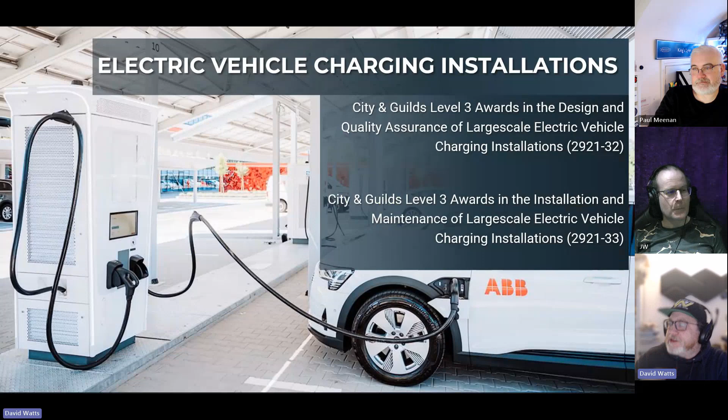So I guess the first thing, I'm going to quickly scan through this material just to get to some key areas that we do focus on.

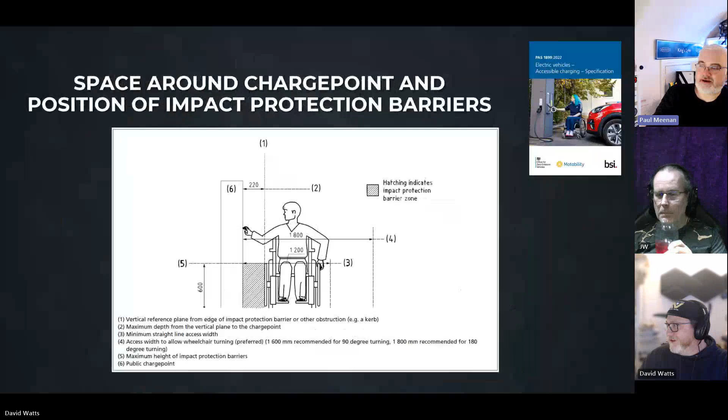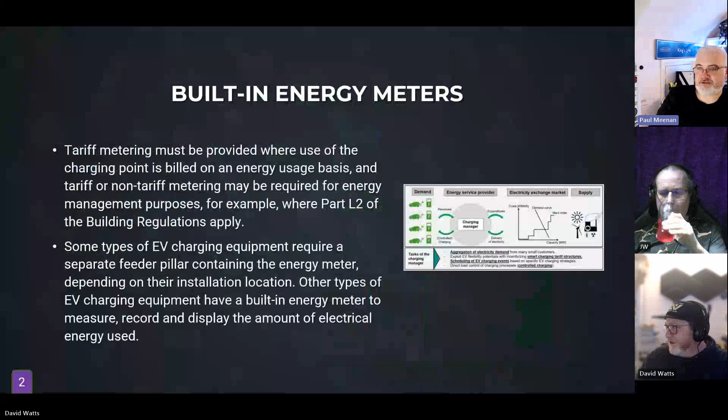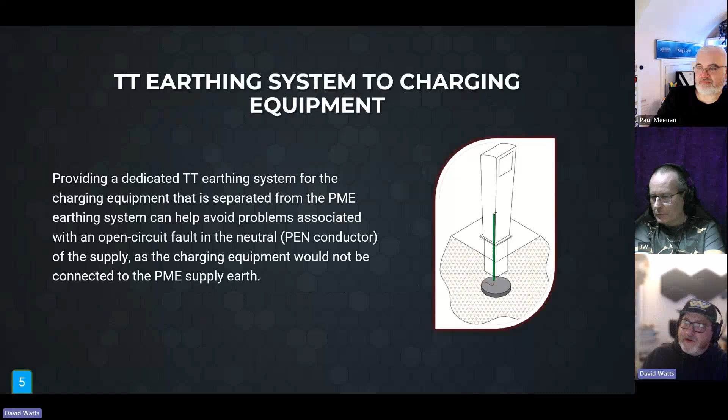For those who are listening, Mr. Watts has got on the screen some of his marvelous EV charging standards and training material, which I'm looking forward to attending one of those courses in the future. You do some quality stuff, Dave. You really do. It's so easy on the eye. That's one thing I love about your stuff. It's an awful lot of work. I'm right now working on my level 3 2365 stuff. I'm trying to get that remastered because the City and Guilds stuff is just not very good. And there's no better compliment than seeing some of your images in there as well. I'm always on the lookout for good training images for you, Dave. And as you can see, they get used.

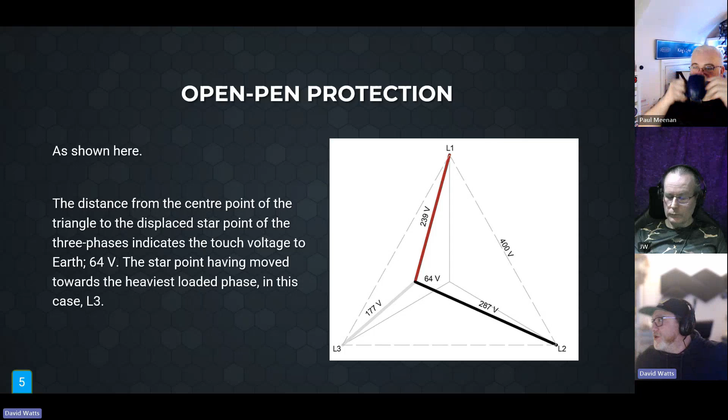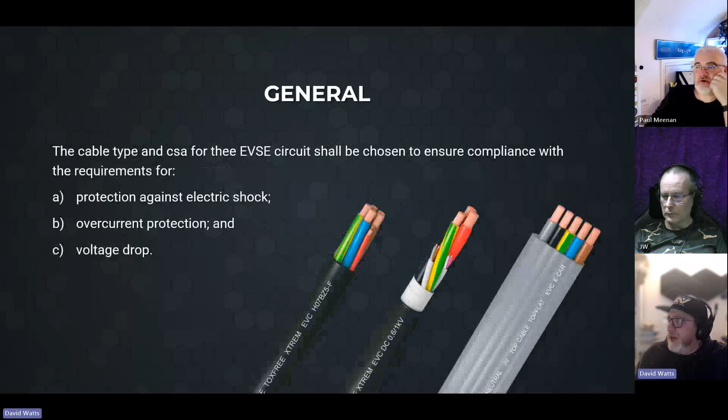So this is the image that me and John have just alluded to with regards to the changes of open PEN. This has been recognised as one of those little issues, but this is more of a domestic challenge. But large scale challenge. We'll brush past 61851 because that's a whole other area. But we cover all sorts of stuff on the large scale courses. But this is where the fun begins. So we have the challenge of

reactance in systems. Okay, so most electricians, when they do designs or cable designs, they do the regs course, they do inspection testing, Ib, In, Iz, calculate It, work out volt drop. Even when they're working on the 2396, the designs really are just for small systems, lighting, power, submain. Nothing is big. And they'll just use software for everything else. And what we highlight in the large scale courses is that we need to identify the concern of reactance with our circuits.

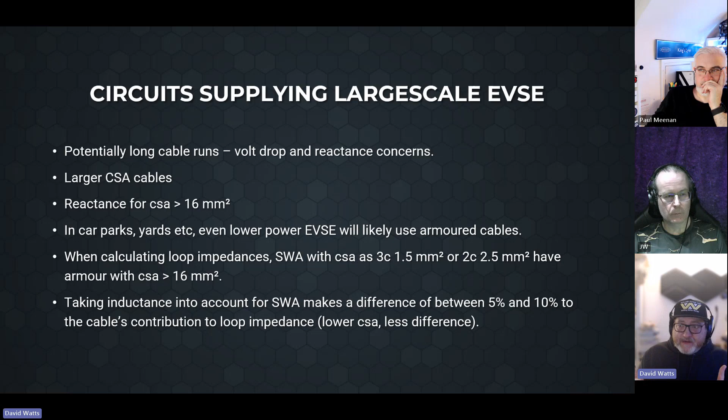So when you look in Appendix 4 in the regulations and you go to cable sizing, the volt drop columns, you'll see that when you get to 25 mil and upwards, you don't just have a single value, you then have three. You've got your resistive value, your reactive value, and your impedance value. At that size, we have to start taking those into account. So with large scale, we have a huge amount of power, and especially if it's AC, we have a likelihood of reactance. So what we cover in the course is reactance. And this is just a little preview of what the formula looks like.

Now, this is actually now in the latest IET code. It was added to the latest IET code because of this course, as Appendix M or N. You'll get these formulas in the IET design guide, in the back, I think it's section D. Yeah, in section D. The one that I'm showing here is just where we're using the armor as a CPC.

So when we have a conductor greater than 16 mil, we have to consider the impact of reactance. And in this formula, it's just the armor that's being used. There's another one that we also use in the course where we have a parallel conductor. But we have this conversion of R1, R2. We have to get Z1 and Z2. Right, so we've gone from ZS equals R1 plus R2 plus ZE.

So we now have Z1 plus Z2. So what have we got defined as Z1 and Z2? Is that the parts of the circuit at different points? So the supply origin and then at the end of line? So Z1 and Z2 is basically like what we think of as R1, R2, but it's including the reactance within the system. Oh, so the CPC and the armored equivalent then. Yeah.

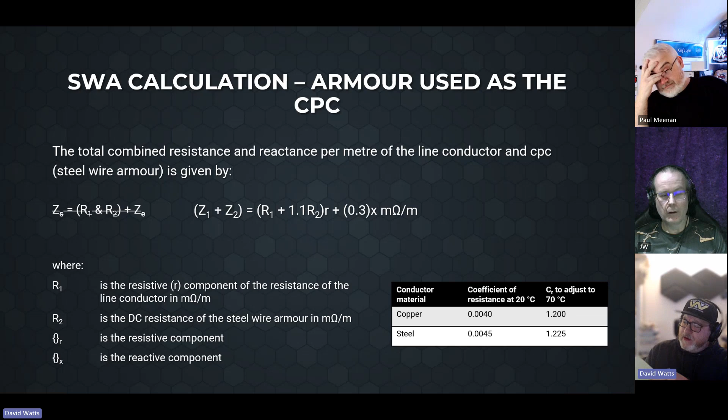But the IET design guide does have this stuff in it, it's just in a section at the back, I think it's Annex D, which is just like other calculations. It'd be nice to get more use. Yeah, further cable calculations, the section's called. But it's good to explore them, and it's good to see how they get used. And I'm trying to bring them into the design course, the 2396. This stuff is technically beyond the 2396 because the 2396 never goes to this level where we have to look at reactance calculations in all the history of all the papers that I've seen.

Now, on my 2396, I have on-demand videos where I go through this as extra, but I can't do it as a fundamental because it'd be too much for them to do their exam. We don't go down that far. The 2396 just focuses on small power circuits and one submain. So there's a model in this course presentation. I go through a few examples, but in the presentation there's this one.

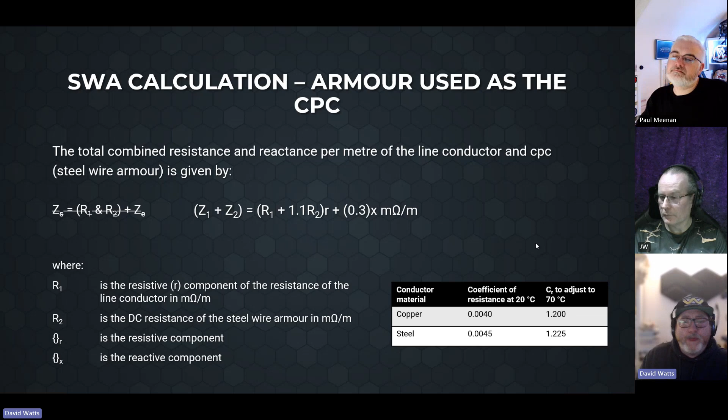We get the data for an example from the table. This is a table that is in the IET design guide, and it's now in the EV code of practice. This includes the DC resistance of armour with regards to the number of cores. The column on the left is the size of your live conductor. Then we have the copper and aluminium cable. So that left hand is the same as the resistivity of conductors for DC resistance. So the DC resistance of armour. DC resistance, yes. Not AC resistance of armour, DC resistance of armour.

We have the DC resistance R. We then work out the reactance when they're large enough. And then we do the square root. Z is equal to the square root of X squared plus R squared. So we turn them into an impedance, which is AC, when we apply the reactance.

Yeah? Well, this is just saying what we've been saying for a very long time. That whole ZE, R1, R2, ZS, the dead test of DC and live test of AC can't mathematically work out and equate unless the magic maths fairies make it equate. But I think John hit it on the head, where really this is only going to become a problem with reactance when the conductors are large and the power is large, or the frequency is large, where there's huge amounts of inductance. So here's a little model example that we go through. If you're watching this on YouTube, you can pause it and have a go before I go.

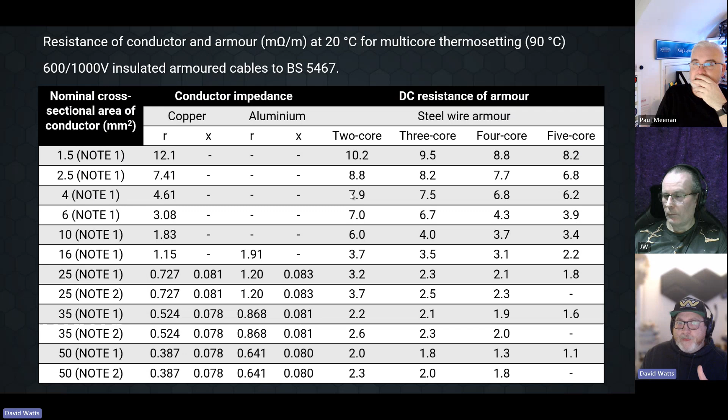But we look at the resistive part. We find the DC resistance of R1, which is a 4 mil conductor. We find the DC resistance of R2, which is a 2-core 4 mil. So if we look at the previous table, we would go, okay, 4 mil, 2-core, 7.9. And if we find that as a DC resistance, we've got 4.61 and 7.9. That's the R1 conductor resistance. That's the R2 armor DC resistance.

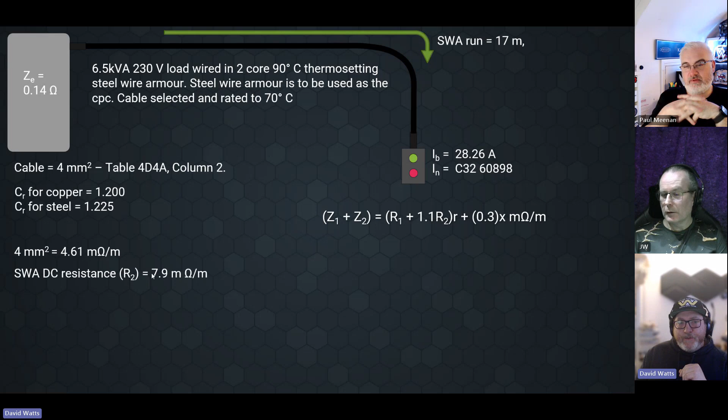We have to apply adjustments for temperature to run them to ZS, because at ZS, they'll be at running temperature. So we just take this formula and we break it into two parts. We have the resistive part here, R1 plus 1.1 R2, and then the reactive part is just this 0.3 here. So we break it into two parts.

First, we'll do R1, which is 4.61 times the copper temperature correction of 1.2. And we'll add that to 1.1 times 7.9 times the correction of 1.225. Like that. So that's R1, that's R2. And those two combined is the resistive value, just the resistive value.

We work out the reactance, which in this case being just 4 mil, you'll notice all the cables, there's no reactance till you're over 16. So in this case, because it's an armor, we still consider the 0.3. And there is a reason for this. Even with cables as small as 2.5, the equivalent size of an armor is actually justifiable for reactance. This is something that we've clarified with the IET.

We're supposed to be working out reactance even when we use cables that are under 16 mil, if the armor equivalent is greater, which is why they've been using this as a model in the assessments. There's no multiplier for it though, because there's no actual cable that's reacting here because it's lower than 16 mil. So it's just 0.3.

We work out their overall value times their length of 17 meters over 1,000. Gives us that 0.28, gives us that 0.0051. You can already see the magnificent addition that's going to make. Absolutely sod all, which is why we've been doing it the old way. For cables this small, the reactance makes negligible difference.

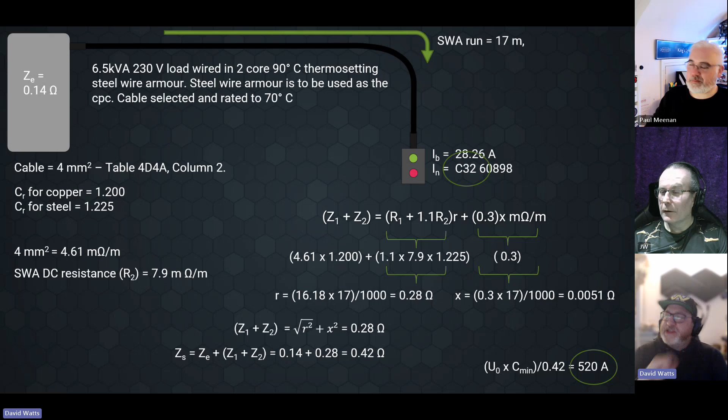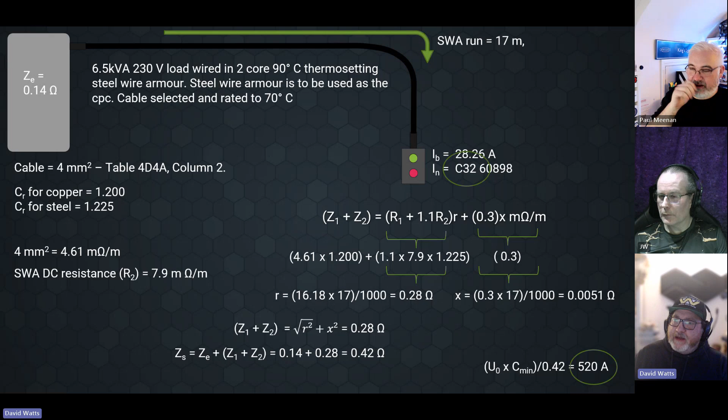Oh, yeah. All right. So that was one interesting area, but the other area is the way these things are having to be installed with regards to planning and installations. So here's an example: grouping, spacing. So this is an example from an installation, large scale EV. We have 12 ducts, and these are 200 mil centers apart. So if you calculate, it's about a 75 mil distance between them. The wiring regulations, from a grouping perspective here, want about a 0.64 or so factor for the grouping of the ducts. And when you're talking about cables of this magnitude in size, it's not workable.

So what they do is they kind of have to play with the data and go to another method. You see? So if we just strictly follow 7671 with a soil thermal resistivity of 2.5 as a default, it won't work anywhere. We have to go and explore the soil. We may have to change the soil conditions in a controlled way to actually lower those thermal amounts.

Just on that. So I'm currently installing new ducting into a railway platform, and we're using a new system called a multi-duct. Rather than having 6 150 mil ducts all spaced out, because of the amount of material and spoil you have to take out, as part of that sustainability drive, they've now got a duct which is like a post box with 6 compartments. It's literally called a 6-way multi-duct, and the railway loves it now because it saves on material out, backfill in.

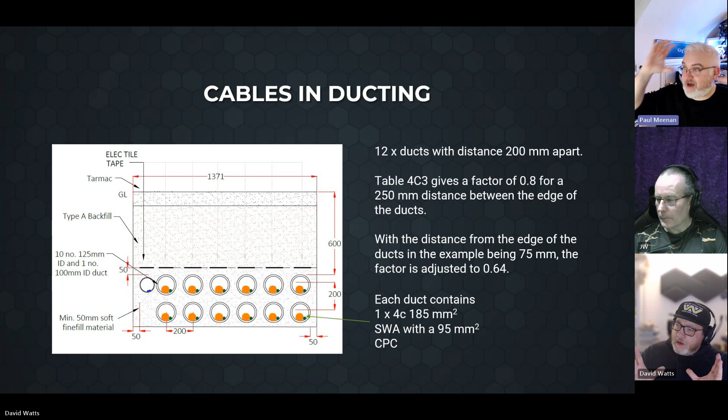But yeah, what about the grouping factors? I'm going to say that does change it. Yeah, is it one duct? It's one duct. Right. I'll get you a photo over the weekend. In fact, I'll get you a photo tomorrow.

But it's one duct, and it's designed to reduce the carbon footprint of duct installations. Do they put just one duct in, or do they put 2 or 3 ducts in? No, just one, but it's got 6 ducts inside the one duct. Okay. So is it just one cable per duct in the duct? It's whatever you want. You can have fire alarms in one, you can have comms in another, you can have power in another, you can have earth, whatever you want. It's another interesting thing on railways.

That's another interesting thing we come to - do you group ducts or group cables in ducts? Both, technically, in this case - that's what the reg says. We actually have to multiply the two grouping factors together. We find the grouping factor of the group of cables in the duct, and we find the grouping of the ducts, and we multiply them for a worst case scenario.

So all of this just makes it significantly more challenging to have a compliant design. I've not seen that in the design software. It's in the regs, mate. No, I know it's in the regs, but is it in the software? I would imagine the software would take that into account - you'd put your grouping in, Cg, and when you say the ducts are X amount apart, it should coordinate two factors and create a new factor. Does it create two Cgs or one Cg that changes as you add two grouping scenarios? I need to check - yeah, interesting.

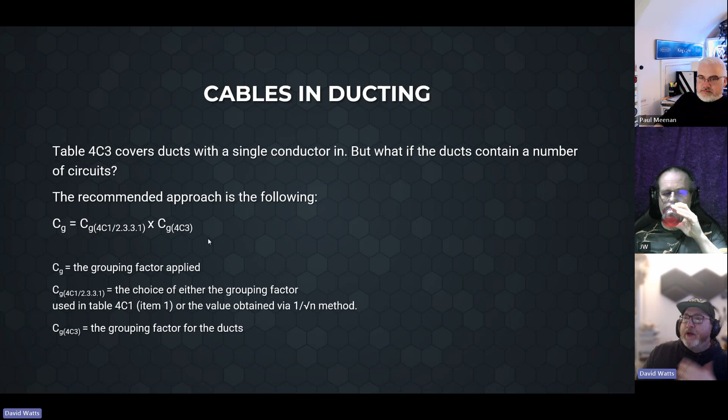This is pushing into an area I found quite interesting when I started this - getting these cables under the ground, looking at soil thermal resistivity. We're not talking about resistivity as conductor resistance or cable resistance, we're talking about thermal resistivity - the barrier for heat dispersing from a conductor. It's not about earthing, where we look at trying to get a nice low earth electrode resistance. We're looking at thermal resistivity here - can the conductor give off heat in the immediate area around it.

So this is where I started to look at the data being used by other manufacturers of cables and where they started to say what their cable sizes were. We found they were using other calculations, not 7671, but they both work to the same 60287 standard or starting point. 60287 is the main standard that no one's ever heard of as an electrician. 7671 takes that and does a very conservative effort, whilst these ERA calculations used in this sector and others have a much more specific use, and we get very different cable ratings.

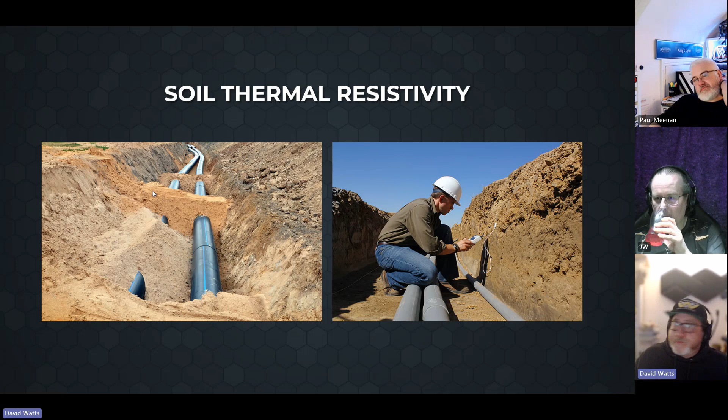60287-3-1, which is a local standard under 60287, has an area in there for the UK. And in the UK, it recognizes the thermal resistivity of the soil to be typically, as a broad-stroke value, about 1.2, which is a lot cooler. There are different materials mentioned as well in 60287, such as chalky ground or different levels of black backfill, but basically it hovers around 1.2. It doesn't have any distinction for seasonal variations, and it has a cooler outdoor ambient and a cooler ground ambient.

Now in 60287, there's a descriptor of the weather conditions that gives us these values, and this is a little summary of what this table says. This data is also in here in Paul Cook's commentary, if you've got the book. Paul Cook's commentary - yeah, cool, that's an old book. Yeah, it's in there. So this is from 60287.

It says that if your thermal resistivity is between 2 and 3, you're between dry to very dry soil conditions, with seldom or little to no rainfall. 7671 puts us in the middle of those two - that's what it claims the UK is. Whilst actually 1.2, which is 60287, says we have regular rainfall and we're moist as our main direction. Now, there are very dry summers and there will be dry soil conditions, but it's most likely that 1.2 is a more approachable value. It's 2.5 because it's worst case scenario when we have droughts - conservative, yeah, it's the conservative approach.

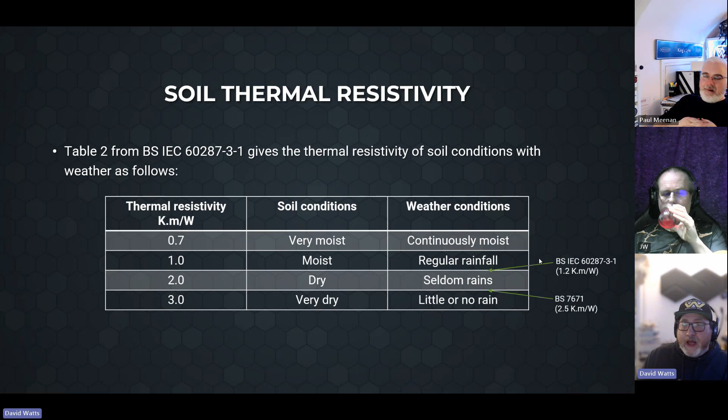Okay, so this is obviously the impact of soil resistivity. You can see here you've got conductors under load, and when there's a 1.2 Kelvin, the actual immediate warm areas just around the conductors are smaller because they've been able to give heat out into the soil. Whilst if the resistivity goes up and up, they keep the temperature.

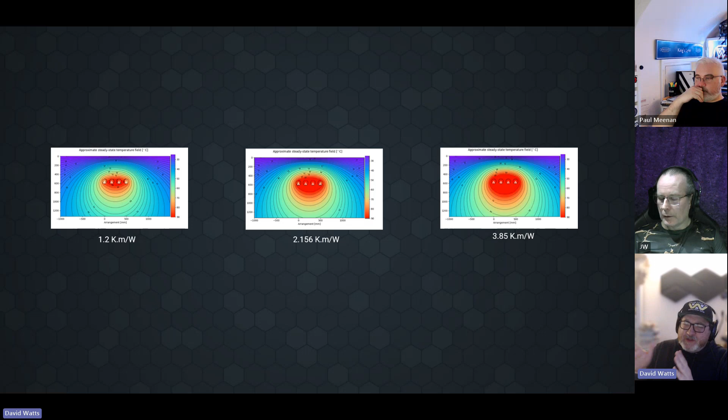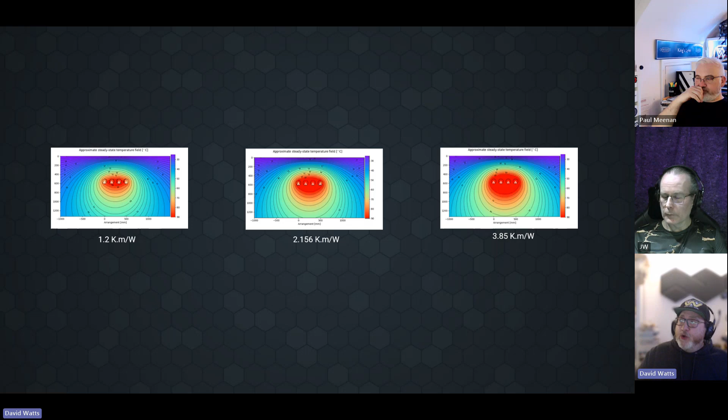So it has a significant impact on cable rating because the soil resistivity impacts heat dissipation. There's a little bit in 7671 about cables buried in the ground. It says under the reference method, in buildings or around buildings, that's suggested to mean that's what it applies to, because if you're out of buildings, you'd probably lean more towards the ERA calculations. It does say in Appendix 4 that if you have specific data on thermal resistance, the ambience, the depth of the ground, you can use the ERA calculations instead of 7671.

This is a little comparison of the two. Very different data streams. There's a part 3 and a part 5 - part 3 is thermoplastic, part 5 is thermosetting. There are 9 different reports in the ERA calculations for different calculations. Quite an interesting read, actually.

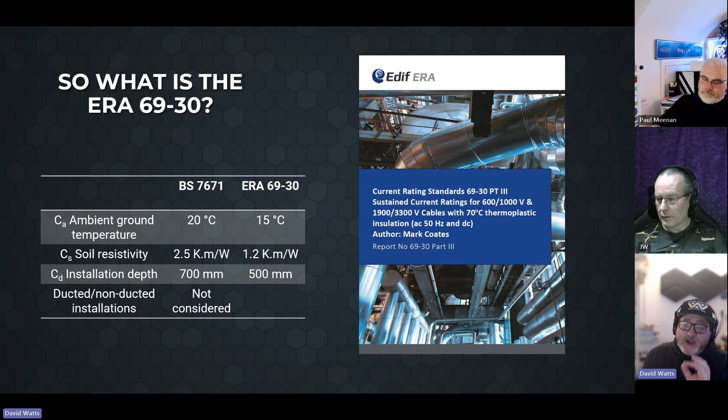So I got 3 and 5 sorted out when I started this, and I looked at all these different data inputs. But it was actually because of the challenges that the designers were having with 7671 that made us look into this. And we found this press release by Prysmian, which also mentions this - it's from Prysmian Group about why they state their cable ratings are different to 7671.

In this release they say that they actually don't follow 7671, they follow the ERA, which is both aligning to 60287. That's the key thing - both 7671 and the ERA calculations align to 60287, but 7671 is under a conservative condition, whilst the ERA requires an awful lot more specific control of the conditions through the seasons. But if you can get those controls and guarantee that condition of the soil, you can get a much better rating in your conductors. This release explains that, and obviously manufacturers want to do that because they can then say their cables carry more current. Wow, you know?

So installation depths are different. The ERA also specifies between duct and buried direct - significant improvement if you bury it directly. Obviously, most people put ducts in for the sake of civils and cable pulling.

But that's the main thing here - these are the two different approaches, but they both match 60287. One is conservative, which is the regs, and one is much more precise data input. Now, the regs is always the fall back and you'll comply, and it's recommended for most designers to comply with the regs, so you have that conservative angle.

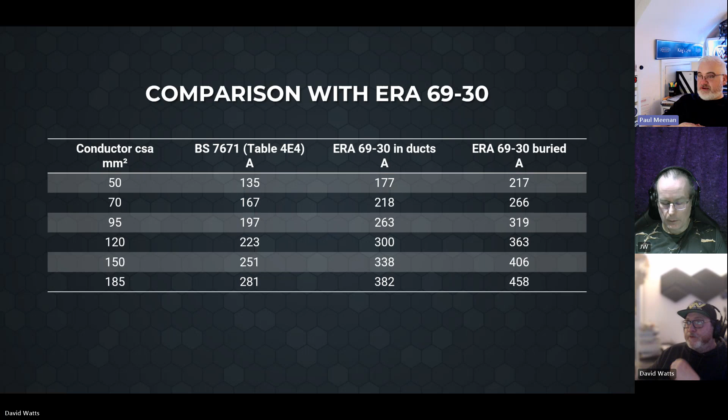Yeah, and we've had a few DNOs on the courses. We've got this other cable they have, I should have brought it in. I can't remember what it's called, a hexafoil or something, where it's arranged in a certain arrangement so it gets an awful lot more current through it, because it's a specialized cable they use from load centers to EVSEs as well. Trefoil, is it? No, there's another word for it. I'll see if I can dig it up. Is it Waveconal or something? Waveconal, I think it's Waveconal. Good old John, he's filled with information. How did I not know that he would know that?

There must be a lot of crossover between this and LV distribution, surely, because DNOs, or DSOs as they call themselves now, have been putting cables in the ground which are massively loaded for long periods of time, for the last 100 years plus. So surely there's a whole wealth of information there which could apply to this sort of thing as well.

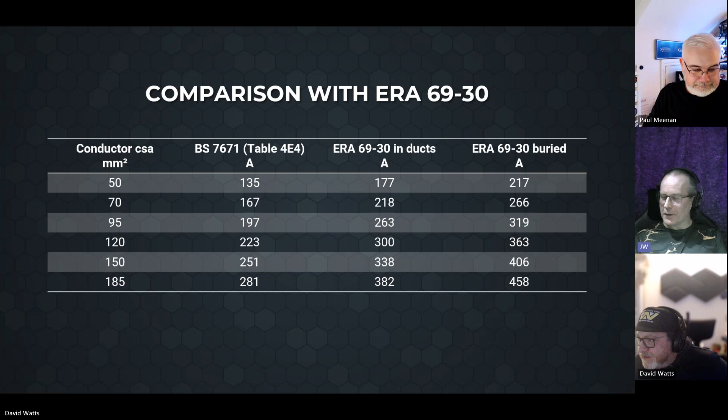Yeah, I'm just looking in my folder. Keep talking, you guys, this is great. I'll see if I can find something on it. And the same with all the stuff about reactance, the cables and things, because again that's all LV distribution and HV for that matter as well. So it's not new information as such, it's just new to these particular types of applications, but the general concepts are there.

I don't know if I'm just thick, or I didn't pay attention in college, or they just didn't teach it. But the older I get, the more stuff I see out there, the more I think, we were never taught this when I was in college.

No. But yeah, having worked for a former DNO, whatever they call themselves this month, the normalization of these common sense things, burying cable direct etc., contact with London clays and the cold moisture, it's going to carry more before it burns out, melts and bakes the ground. We've even seen pictures where you've got snowy ground and the cables are so hot they're melting the snow above it. It's fascinating stuff.

God, we didn't do any of this on my 2919. No, doesn't touch it at all. The 2919, and to be honest the 3.4 now too, it's all about earthing and protection really. On the large scale we have to cover that, but we also have to cover selection, and accessibility, which is a huge issue that people are still getting wrong. A lot of the big players aren't getting it right, even with the latest PAS 1899. They're still not fully doing it. A lot of charger operators and manufacturers aren't even making them accessible still, so we have to put all of that in there as well.

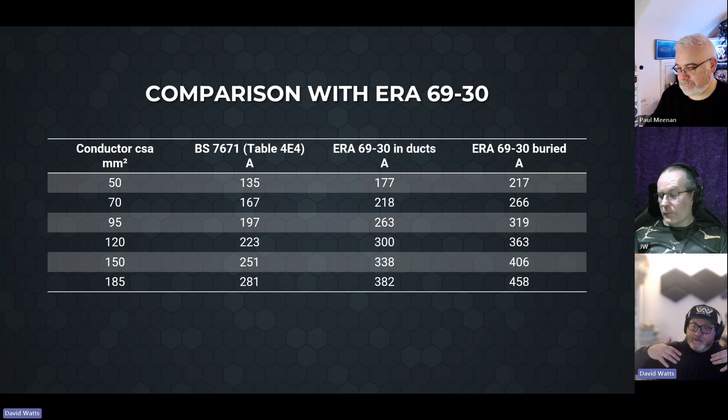And that's the thing, an awful lot of these early cars don't have that demand, they don't have the technology for it. But we're getting the latest Porsches, the latest Teslas now, and they're very much hungry, because they're trying to push and push and push and push.

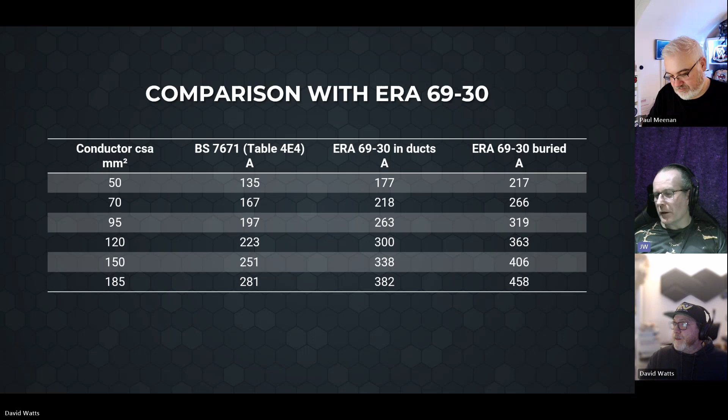So a lot of this stuff that's been installed and open for a couple of years now is going to be soon under a much larger demand than it's ever seen before. Yeah, because there are even certain cars that can charge up at like 300, or they claim to. Yeah, if you arrive there at 10% and the battery's all heated up in advance, and you plug it in, yeah, it will go at like 300, but not for very long.

So you plug it in, it's like, oh, it's 300. Then, oh, it's only 240 now. Oh, no, it's only 180. So certain vehicles will carry on at a large rate, but an awful lot of them, it's only for a very short time, and then it immediately drops back. So, like I say, it's rare that this equipment is even put up anywhere near its maximum at the moment. And this is a concern.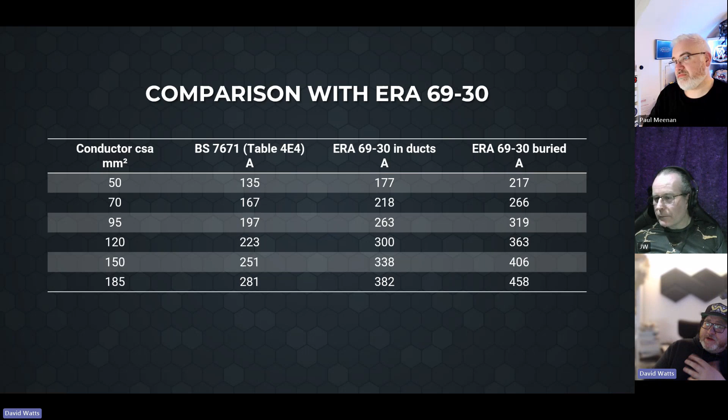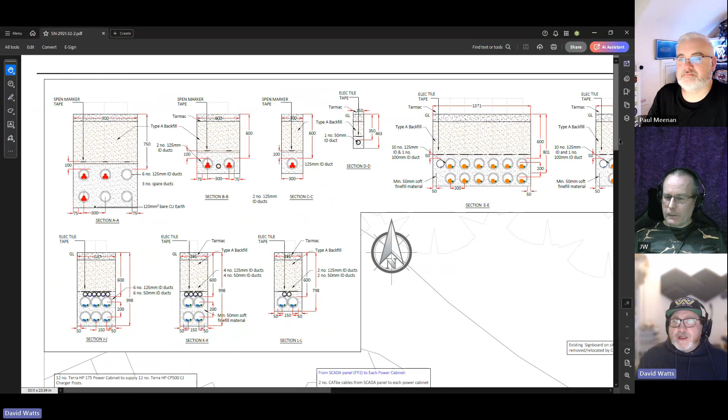I had a chat with the IET about this, because they asked for comments on how this course is going. I said it's good, and I gave them some heads up as to a lot of their designs. 7671 was kind of left at the door at some point because they had to go down the ERA direction, and I've got a drawing here of an installation. Can you see this in the share? Yeah. So this is an installation that was drafted for being put in on a motorway.

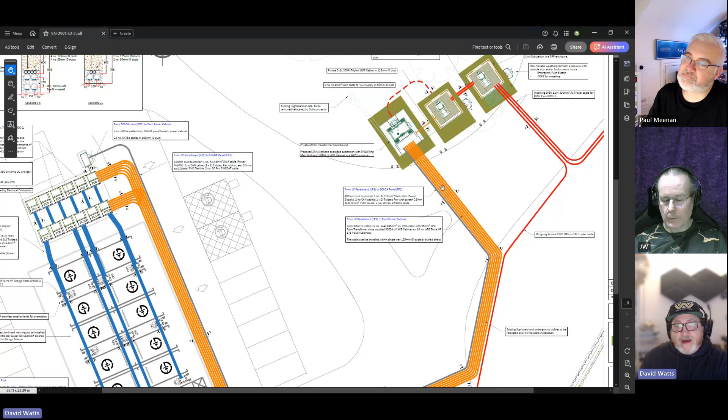And you've got here the ring main of the HV coming in and then leaving. You've got the HV that goes onto the other side for the southbound or the northbound. You've got the AC. These are the AC ducts. So if I go to E here, we've got 1, 2, 3, 4, 5, 6, 7, 8, 9, 10, 11, 12 of them. Wow. You see?

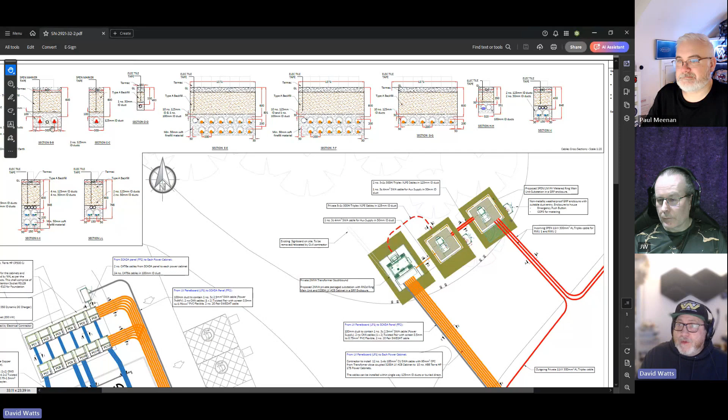So right now they're probably barely ever on to any potential. But if they get put onto a potential, there may be some issue. Hopefully, an awful lot of these will get away with it. But right now, though, we don't know. It depends on how much they demand, how much more they decide to stress out, because they're constantly adding power.

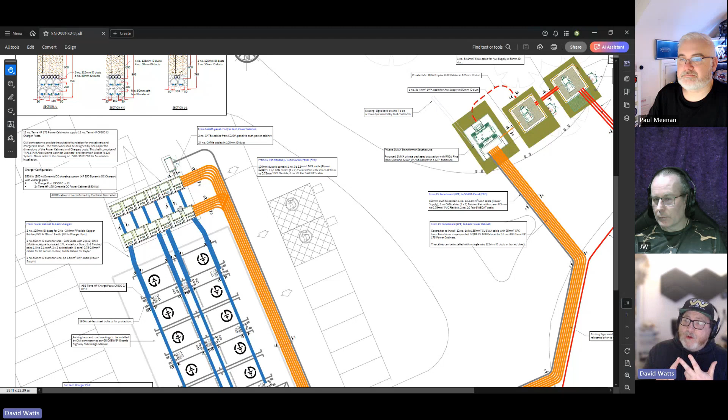One charge point operator, for example, who I won't name, put in an installation just like this. They put in the power cabinets, the charge points, and then the charge point operator who they handed it over to changed the power modules in the power cabinets from 30 kilowatt to 45 kilowatt by themselves to make the chargers more powerful. The way they achieved that is they drove up the DC voltage over the rating of the cable in the DC ducts. And they burnt the cables out.

I believe they promised not to do that again. But that's just the thing. There's this hunger to be powerful, to be quick, to then get people to buy EVs. We're talking here about rapid charging now, not destination charging. So the main point of the large scale really is to focus more on the rapid charging. Large power, quick, get in, get out.

They want you to basically be charged up by the time you've gone in there, bought yourself a coffee, and used the toilet. They don't want you more than 40 minutes. Because this is expensive infrastructure, and they want every other car to use this technology in the future. So they need you to get in, get off, get on. Isn't it limited as well? If all the bays are charging, it will limit each one's charging capability.

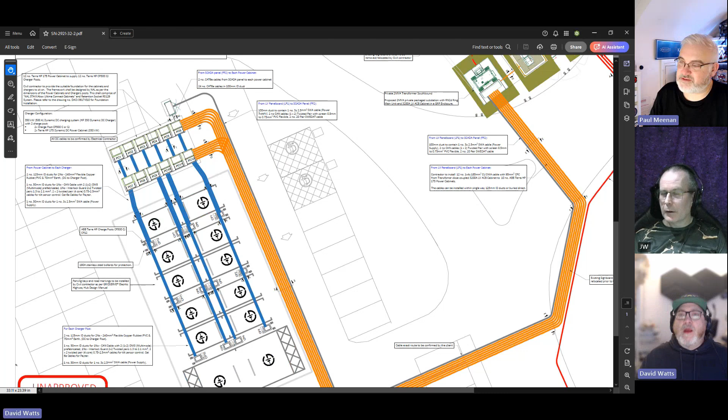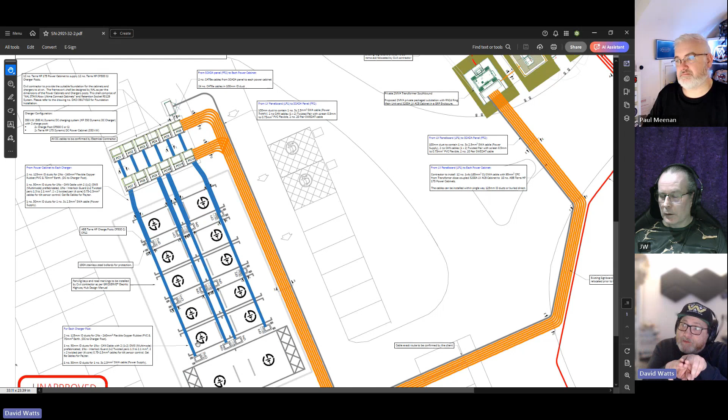It depends on how they're currently connected. So, for example, these ones, let me just double check. These are 175 power cabinets, but each one has 2 DC circuits, so you can actually put 2 175s feeding one charger. So what that means, and I've got another drawing here of the other side of the motorway, is when we get to the grouping of the ducts, we've got an awful lot of grouping going on here.

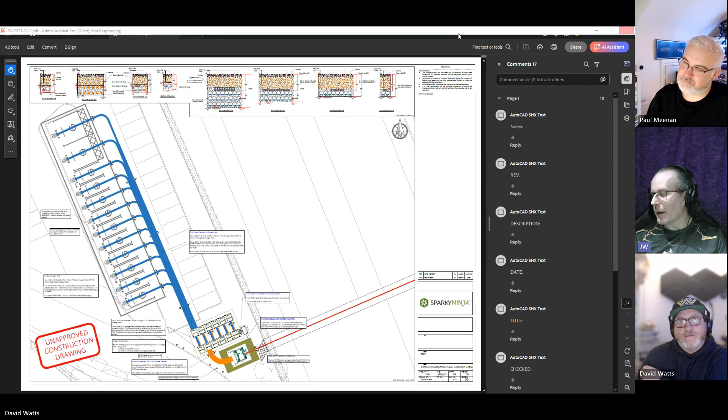Yeah, the voltage thing is quite interesting, because this is why a lot of vehicles can't charge at the rates claimed by the manufacturer. You've basically got 400-volt vehicles and 800-volt vehicles, and yeah, you can get the high powers on the 800-volt system, but if you go to a charger at only 400, well, good luck, because it's not going to happen. No. So this is sort of leading to customer disappointment when they buy their vehicle and it says, oh yes, it will charge at some massive rate, and they go to chargers at only 400 volts, and oh no, sorry, we can't do it on this one because of obviously limitations.

But when you think about it, you've got an 800-volt battery in your car, those DC cables are going to be pushing out 900 volts plus. Yeah, that's a lot of voltage. That is a lot. And the thing is, a lot of the DC cables that were going in weren't for that. So they had to change the cables, and a lot of people have had to change the actual specs of their designs for these cables because the charge point operators have just been pushing the limit again and again.

So who designs this stuff then? Who comes up with these designs? Is this the manufacturers of the charge points? Is this just a designer we get off the street? Because I'll be perfectly frank, I've seen EV charger installs, and I've never seen the level of calculations, formulas, and designs that you're talking about today. So this, for me, has probably been the most learning and insightful podcast we've ever done.

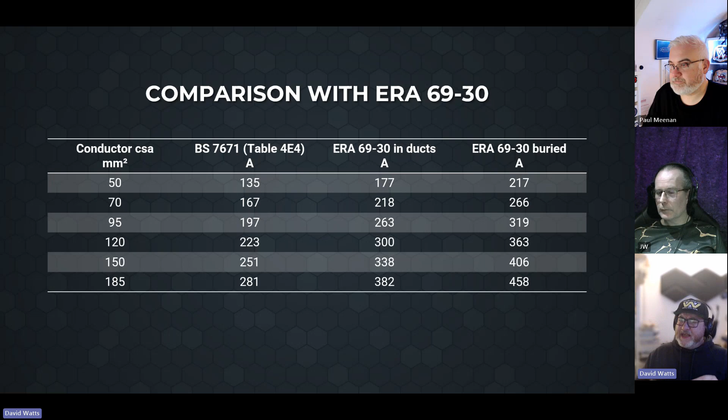From my experience, I've worked now with about 30 different companies who are doing this, big scale. There's 4 or 5 key pieces of software they use, but a lot of it is, I wouldn't say trial and error, a lot of it is sense checking. I get a lot of emails sense checking designs, giving a bit of input, because you saw that cable run. You're talking about 50 meters of a 240mm cable. If you're going to say, in my calculation I'm going to now do this little factor, which is going to make me require a cable twice the size, you're not talking about an extra few £100.

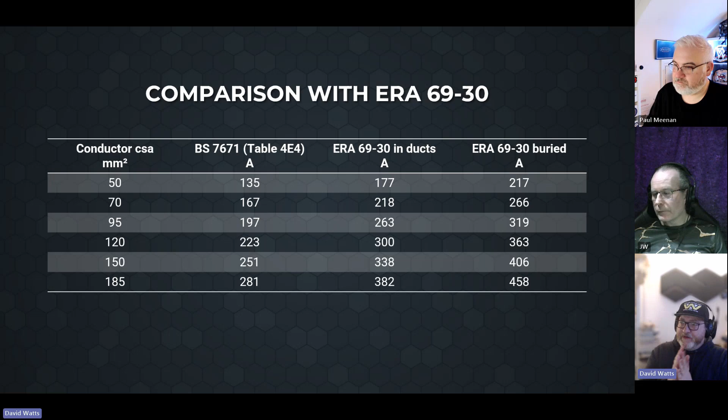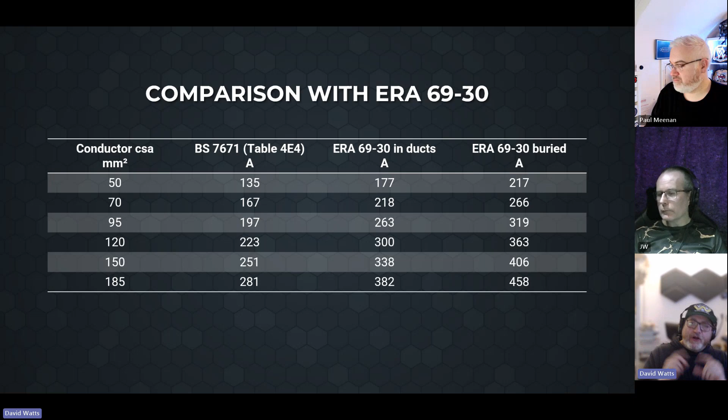So they have to constantly try to design it down and get what they can in those cables, and they have to find ways to understand how they're going to be okay. So in a lot of the training, we go, okay, look at the thermal limits, look at ideas about, as you say, the snow will never settle on that area. We need to be cautious as to how warm these will get when they are put under this demand, but they're not under the demand now. Which is the underlying concern: we put these things in, we commission them, we turn them on, but really we won't know until we've got an awful lot more EVs out there.

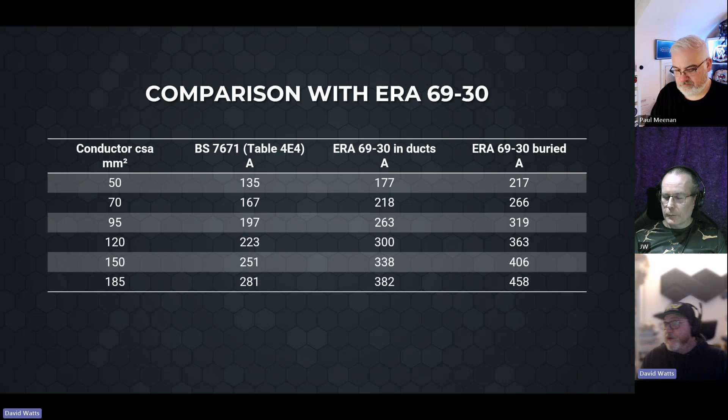Right, is that now behaving? Yeah, it's now behaving. All right.

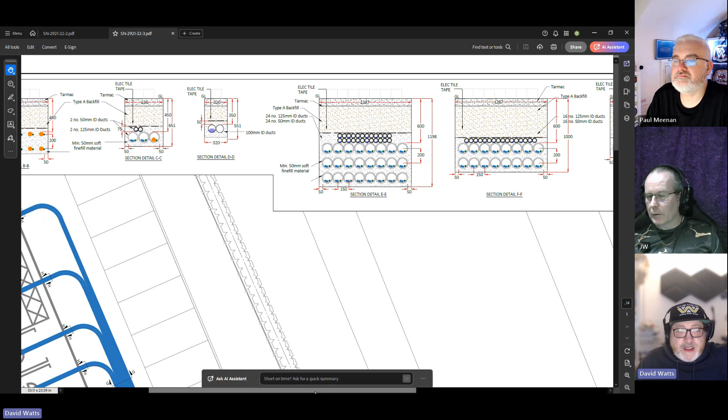So yeah, this is the other side of the motorway. So we've got here in this section 24 of these, because each charger gets 2 ducts with its own DC circuit. So each charger has 2 DC circuits, because each charger is fed by 2 cabinets. Because as you asked, Paul, how much they can take: one charger can be fed by one cabinet, or if there's no one next to it, it can use the other cabinet. So they can actually link at the cabinet and then feed both those circuits. And if someone comes and plugs in, it can then communicate that to that cabinet, disconnect from that link, and then only one of those circuits will be fed.

So they have a good way of distributing the power, so you can get the gains and you get the maximum that's there potentially. But it's why a lot of people, when they go to EV, they won't park immediately next to the other car, because they know that those 2 cars are going to probably share a cabinet or 2 cabinets. They'll often park further apart. Same with AC fed ones. AC fed ones are much louder and much noisier, much bigger, but the same thing.

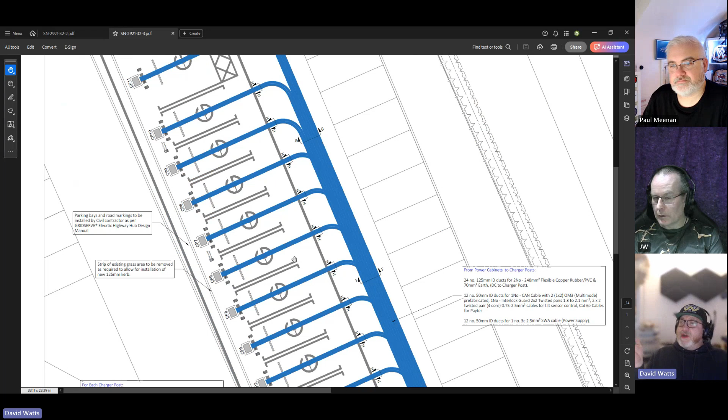They'll have power modules internally, and you can have them so that all the modules and power modules go to one plug, but someone else plugs in. It can then look at that, and it could be a first come first serve. It could be a 50-50 share. It could look at the battery status. So I could plug my car in at 70% charge and have 100%. Someone comes in that's got 20% left, it can give them 75% and give me 25%.

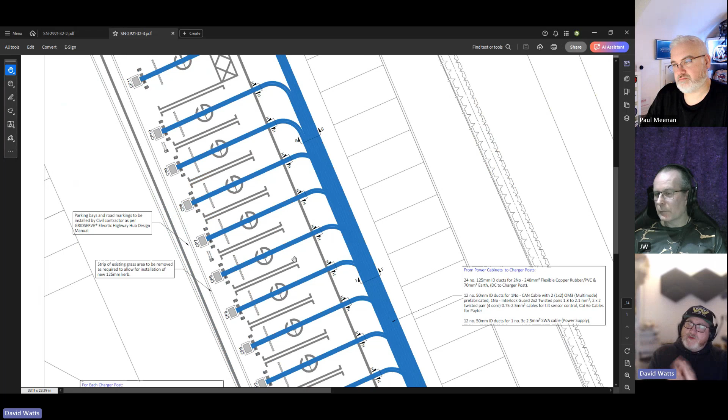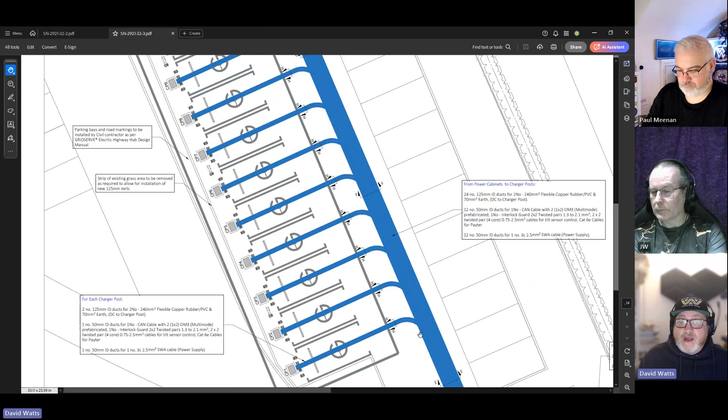So the charge point operator has these controls. Manufacturers put some basic controls in there, but you can use software for better controls about how the power is distributed. The priority will always be try to give everyone the maximum potential, but always make sure there's enough. But what we don't have, as I say, we don't have enough cars. When we have more cars, we're going to put more thermal load on these systems. And right now, they're not necessarily grouped very well.

Very well. Question then, you mentioned about software and stuff controlled. Does any of the software have any SIL integrity rating on it, or any design checks for the software side of it? Any safety checks? I've inquired with 2, and they said yes. And I said, does that mean I can say it's a safety? And they said they couldn't confirm.

Because I've always said this to the guys on the courses, we have to be very cautious if we're going to use software for the purpose of protection. When software takes over as a protective purpose, we've obviously got extra work to do. And the couple that I have contacted have said, yeah, it does this, it does this, it does this. So can I sign it off as my protective function? They were a little bit loose with that. I'm sure there's one somewhere that says it's fine.

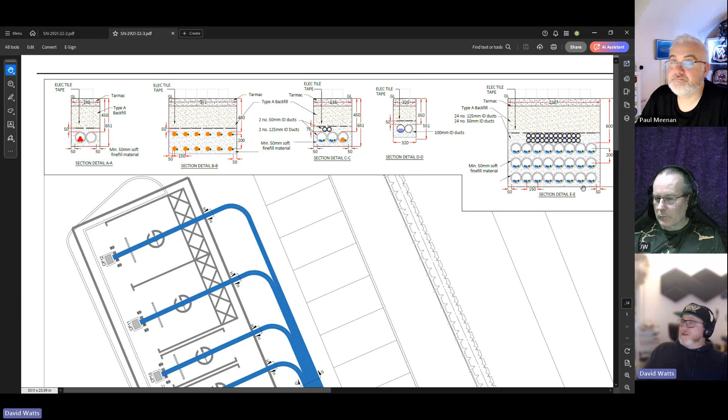But there's an awful lot of load management. There's an awful lot of hope that things will work well in the future. I've not seen much in the way of thermal management for the cabling itself, because I've said to a few, could you put in a temperature sensor? Those hot connects. Could you have a temperature sensor that works at the temperature of the conductor? And it's not hard to do. Nope. At all. External sticker on it just to check whether the temperature exceeds.

Yeah. But even if you don't want to stick it because you're leaving it somewhere where you're not attending it, you could put a little temperature sensor, a thermocouple or something, down the duct on the cable. And if that temperature gets to a certain temperature, it can then hit an alarm. It can then talk to the management, because there's a monitoring system. All of these chargers have their own separate AC feed because they've basically got their own control circuits. And you can have a sensor that will then create that alarm.

Right now, that's not on the radar because nothing is being powered up to its potential because people aren't queuing up to charge. But we may get there in the future. So it'll be interesting to see what happens in the long term. Someone is going to innovate a method of thermal management. Somebody needs to implement a method of thermal management, because right now the thermal management we use in 7671 in design is grouping our ducts and putting factors in.

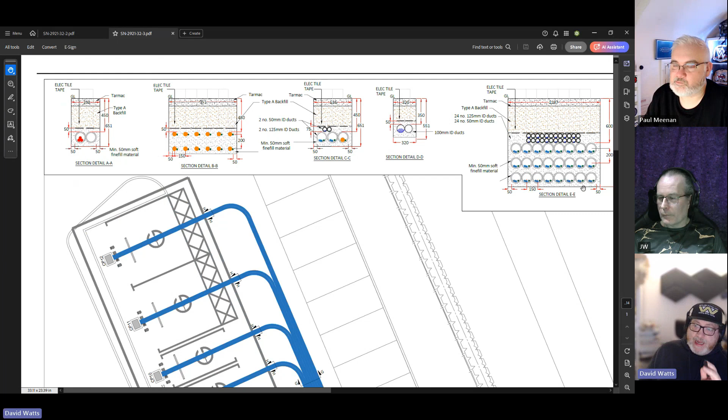They're not doing that in the large scale space because they can't. They can't obviously create trenches that deep and that wide to space those apart. For there to be no factor, they've got to be like nearly a meter apart or something. So they can't practically put them apart far enough for there to be no factor, and they can't afford to put in factors.

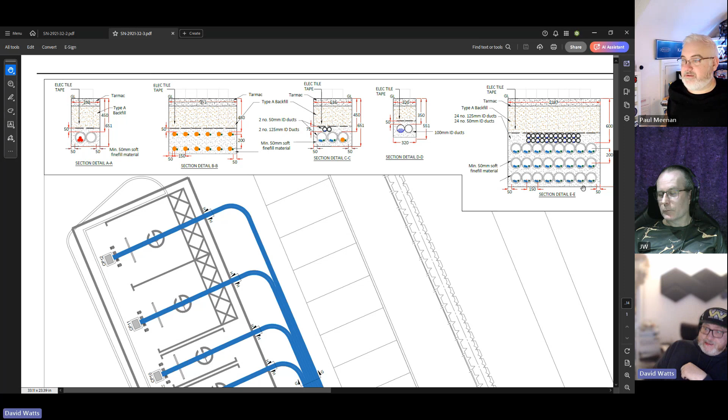Well, my brain's knackered. So again, 7671, there's a little bit of a merry-go-round. So large scale EV basically can use some of the intent of 7671, but basically it gets left at the door. 7671 needs to go into this area, and it needs to give all of the designers, all the design houses, all the contractors better guidance and confidence, whether it goes and gets the data from ERA and goes, yeah, we can use that. But you must make sure your soil resistivity is identified. You must make sure your depths are verified. You must make sure the conditions of the soil are guaranteed through the variations.

Fine. But it needs to give some workable method, because if it says, oh yeah, space them a meter apart, you're fine. In this makeup, you can't do that. You know what I would do, Dave? I'm not suggesting that the IET do this, but I would obviously update the wiring regs, but I would probably create an on-site guide for domestic, commercial, and industrial. Yeah, maybe. And clearly segregate the on-site guides into specific. Even if you did one for EV, one for rail, one for water or whatever, but you actually gave people more information of how to implement and manage the risks and challenges of certain sectors and specifics, because there's just not enough out there.

But no, and again with this sector, they're now in the megawatt territory, so we are looking at trying to find ways to put in distribution above ground on rail and racking and things to keep the thermal limits within control. But that's okay for a dedicated megawatt system. But this thing in the future, when it's going to have a much larger demand, you could say it's only going to be a short period of demand. But if the cars come and take the full potential capability of these power supplies, then there could thermally be some challenges on some systems. I'm sure we'll get away with it with most. But there are design limitations in 7671. Put it that way. I think that's fairly evident and clear.

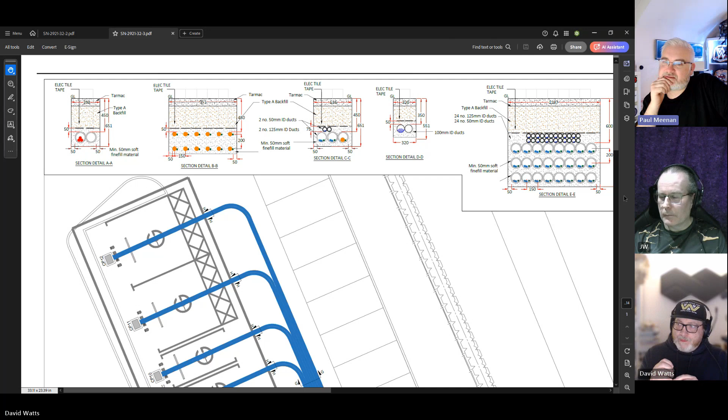Is there anything else you would like to give us on the large scale EV, or is that enough for today? I think that's enough for this. It was just mainly an interesting point about the fact that 7671 gets to a point where we can't use it. That's mainly what I wanted there. There's areas of 7671 that we have to leave 7671 behind. With the design, we have to do bits we've not done before. With this arrangement here, we need to do things we haven't done before.

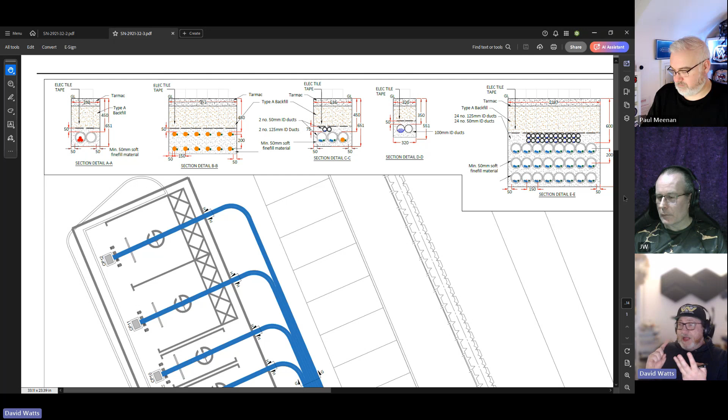There are many other areas of interest, and obviously looking at the technology now, there's so much going on with regards to the plug connections, the cable types, the actual way things are being communicated. There's also so much going on in the domestic sector, to be fair, and the small commercial with regards to EV. But things are moving so fast, we're not getting enough time to catch our breath, and that's what scares me. And figure things out. And my concern, and I had this chat with one of the guys at the IET when I saw him at CEF Live a couple of years ago, is a lot of these designs aren't going to be thermally loaded for a number of years, and some of them may start to actually struggle unless we react or we provide some further guidance.

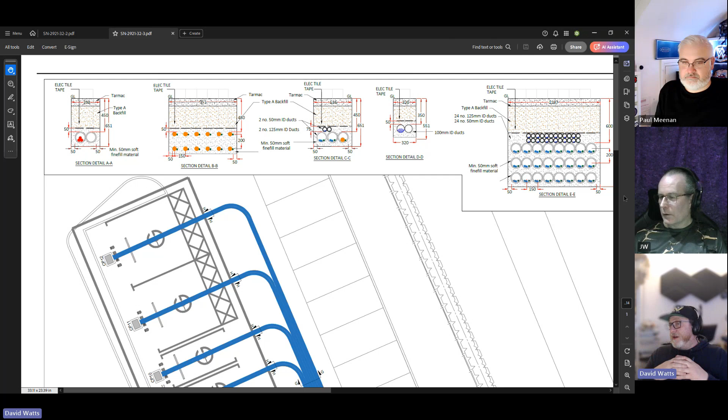Well, of course it will. With anything new, something has to go bang at some point. But there's an awful lot of money being thrown at this, and again, many of these have had to be reinstalled already. Many of these have had to be reinstalled because they weren't working. There was insufficient supply. The software didn't work. They didn't have enough network, or the demand of it wasn't big enough. They had a bigger demand now. I've got one dropped off at my center that was beyond requirement because it could only produce 22 kilowatts. Only. And we're just moving too fast. We are indeed. But that's the target we've been set.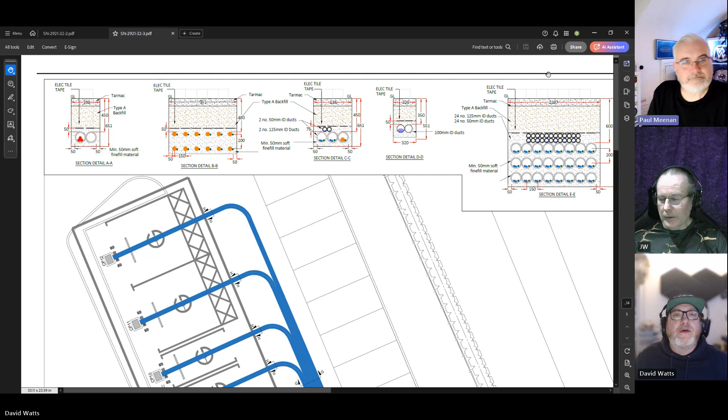Dave, you've absolutely won. So I'm going to offer John a challenge because, John, you are an EV driver. So I want you to somehow work out in one of your own unique YouTube videos to get your van to charge at 1.21 gigawatts. And then we can go back in time together in your van as a team. Can your van do 88 miles per hour? Yes, it can. Oh, that's only John on a test track, Dave. Of course. Only on an approved test track off of public roads, of course. But of course, okay. Having been in John's van, you can vouch for that. Yeah. Yes, and when you were in my van, it wasn't even set on high power either. So no, and this is why I think John would make a perfect extra in the Fast and the Furious movies.

They wouldn't even need to direct him; they'd just say, "Get in a van and go for it." And Vin Diesel would be very envious at his skills behind the wheel. But yeah, okay, all right. Well, there's a hell of a lot to unpack on that one. Well, we did say we'd podcast random electrical things, and that's very good.